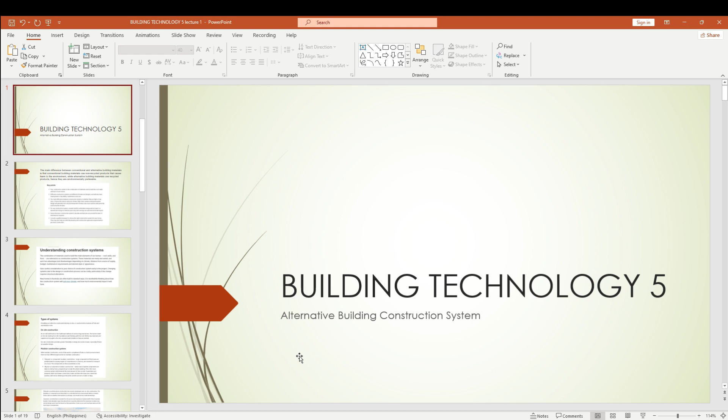So today we are going to discuss our first topic of Building Technology 5, Alternative Building Construction, by, of course, yours truly, your instructor, Architect Jenny Divino Libot.

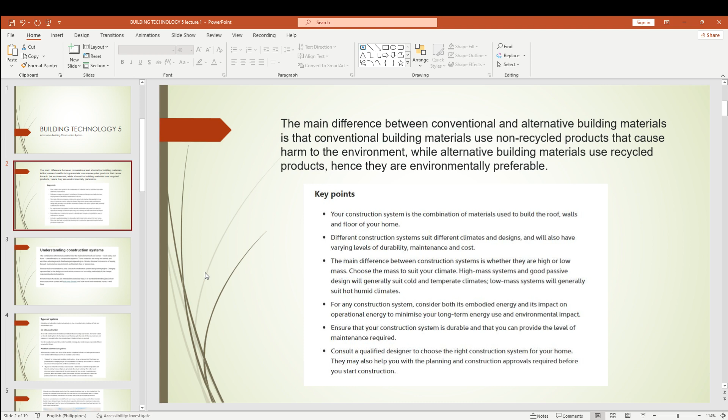So, understanding construction systems - the combination of materials used to build the main elements of our home: the roof, wall, and floor. That's why I mentioned earlier that the main elements are roof, wall, and floor. The systems used to complete our roof - that is a construction system, a combination of different materials.

Each material varies with its own advantages and disadvantages - you decide what to use based on the environment and the type of building you're constructing. You have to give careful consideration to your choice of construction system, because you can't just change systems. For example, if you've already decided during the planning stage what system to use, and then on site you want to change it, you'll have difficulty.

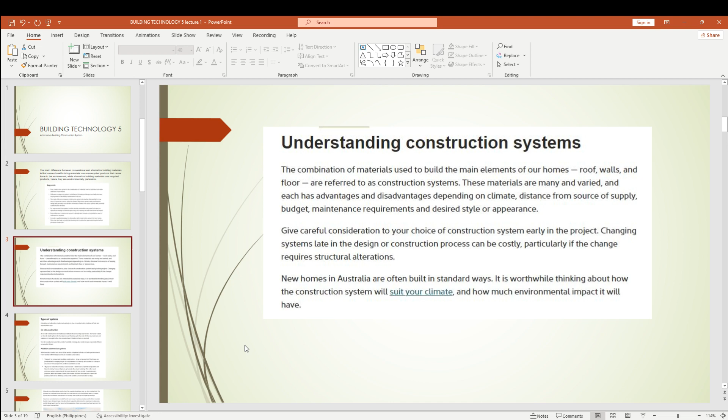Why? Because the structural system needs to be changed. We don't know if changing it can be handled by the structural system for the type of building you're constructing - that's a big problem. So we have the types of systems: a building can either be constructed on-site, which is the traditional method, or off-site, which is the modular construction system.

On-site construction is the traditional method of constructing a home - you see them delivering sand, cement, and other materials, then laborers or backhoes dig, you make the forms on site, and then you have concrete pouring - that is on-site construction. It takes longer, but it has higher flexibility when it comes to design, and if there are changes, they're easier to resolve.

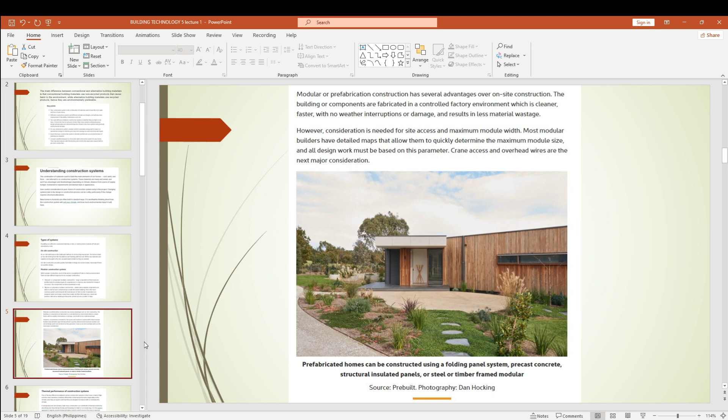Now we have the thermal performance of construction systems. We have the high mass and the low mass. If you read this, it is very understandable when we say high mass, heating can reduce heating and cooling energy. As I mentioned earlier, when you say high mass, it is better suited for cold climates.

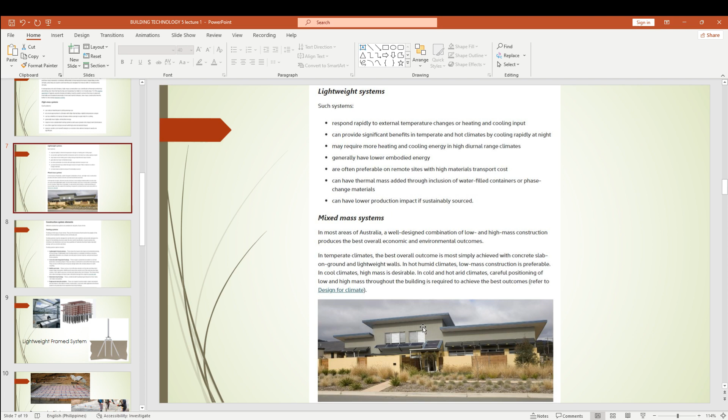Next, we have here the footing systems. Let's start with the footing system. Of course, the footing is the base of your building. It is designed depending on your soil condition and the wind classification of the site.